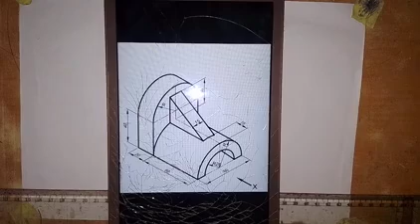Here we are going to be working on this problem. We are going to produce the orthographic views of this object, and the direction of view for the front elevation is the direction of this arrow X.

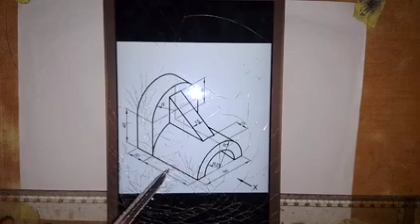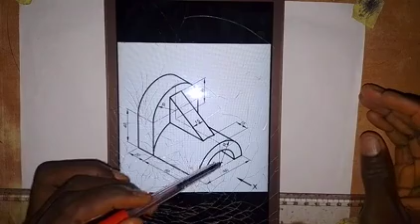So with what we have here, let's talk about the dimensions. We have that from here to here is 80 millimeters, and the radius of this semicircle here is 20, while that of this particular one, I can't see what it is. It is not dimensioned, but I'm going to take the thickness as 10, and then I'll take it as 30 millimeters. So that's what I will take as the radius of this arc here, or the semicircle.

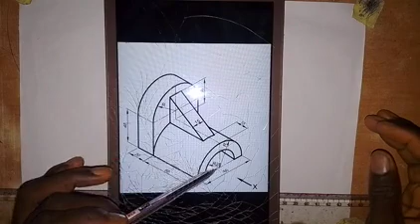And then the distance from here to here is 15 millimeters. The thickness of this is 15 millimeters, and the distance from this point on this surface to this point is 30 millimeters, and also we have the radius here to be 30. The radius of this is known because this is the midpoint, and from here to here is 60. So from this point to this point is 30. So we also have this to be 30.

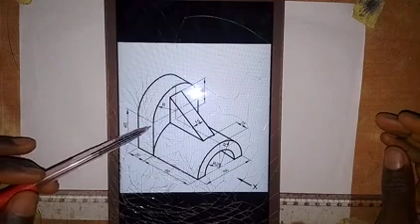So that's the radius of this arc or semicircle, and the distance from this point to the center of this semicircle is 40 millimeters, and the distance from here to here is 60, and from here to this end, the thickness, is 20 millimeters. So we are going to be making use of these dimensions to produce the orthographic views of this object.

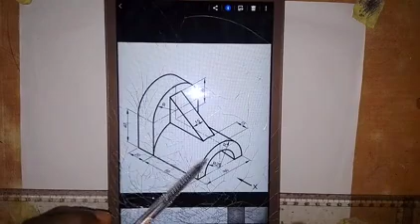But before I go on drawing, in the front elevation we are going to have these two semicircles, then we are going to see this rectangle, and then this part that we see here. So those are things that we are going to put together to get the orthographic views of this object. So let's start with the front elevation.

So the first thing I'm going to do is draw a horizontal line from this end to this end here. Then I'm going to draw a center line to produce the semicircle. So I will draw a vertical center line here in the middle, like this. Okay, so we have this center line.

The next thing I'm going to do is take a radius of 20 millimeters, from here to here. So this is 20 millimeters. I'll put it at this point, then I will draw a semicircle. So it goes like this. So this is the first semicircle that we have down there.

And then the next one, I will take a measurement of 30 millimeters and put it at this point here. And then I will draw the second semicircle that we see in the front elevation. So we have this now.

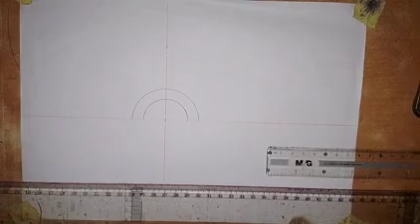Then the next thing I'm going to do is make these lines thick lines. So make this line a thick line from here to this end, as we see it in the front of the object. Then I'm going to take a measurement of 40 millimeters from here to locate the center of the other semicircle that we see there.

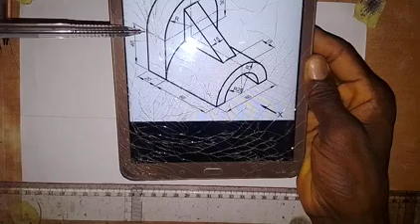So let me bring the diagram as we have it. Okay, so this is the diagram. From this base here up to the center, we have 40 millimeters. So I'm going to take that measurement of 40 millimeters up. So this is 40 millimeters here.

Then with this now, I'm going to draw a horizontal center line, like this. Then I will now take that 30 millimeters again, put it at this point here, then I will draw a semicircle. So it goes like this.

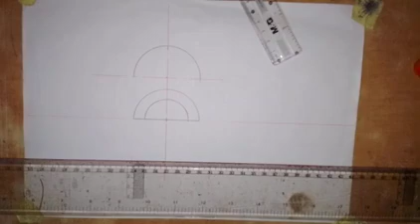Okay, so I want it to be more visible. So we have the semicircle here now. So the next thing that we are going to do here is that I'm going to complete this as a vertical line. So we join it together with this, and then this also, we are going to join it together with this. Okay, so we have it like this.

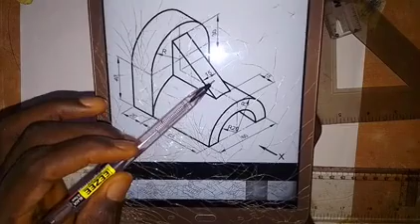So then the next thing that I'm going to put here as part of the front elevation is this rectangle. So let me show you. This rectangle that we have here is going to give us a rectangle. So just after the part for the front elevation, we have this part, and then we have this part, and then we have this part for the front elevation. So as we have that, the thickness of the rectangle is 15 millimeters.

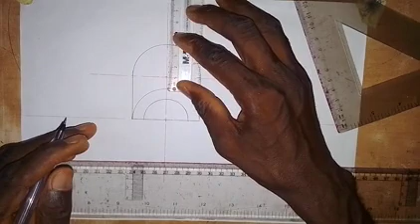So I'm going to take a measurement of 7.5 to the right and 7.5 to the left side. So this is how we have it. So 7.5 to the left side. This is 7.5 here, and then from here again 7.5. So we have it here. So that's 7.5, and the height of that is 30 millimeters. So right from this point, we take 30 millimeters off. This is 30 millimeters. Okay, so I'm going to draw at this point here.

So I will draw a vertical line. So at this point, I'm going to draw a vertical line. So we draw a vertical line here. Okay, and also at this point I will draw a vertical line. So then at this point I'm going to draw a horizontal line, and that horizontal line, I'm going to take it across to both sides like this, because of the end elevation.

So then we are going to thicken this line. So we make it a thick line from here down to this point, and then we also make this line a thick line from here down to this point, and then we also make this line a thick line from here to here like this. So here we have the front elevation. So that is it. So now let's go for the top view.

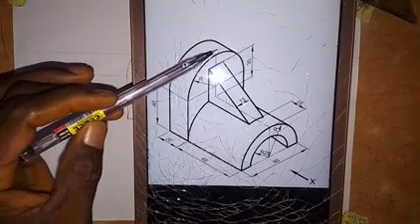So let's see the part that will give us the top view or the plan. So first of all, we have this rectangle. This is going to form a rectangle, and then we are going to have this as a rectangle. Then this part also forms a rectangle. So those are the parts that we are going to have. Then I'm looking at this point. This particular point is going to be hidden in the top view. So we have to take that into consideration.

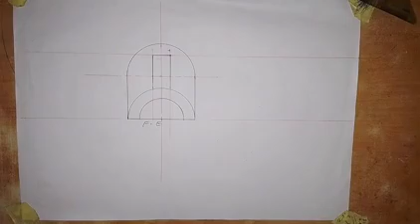So let's look at how we can produce the top view or the plan of this object. So what we have to do first is that we need to draw a vertical line down from this point. So we draw a vertical line down here. Okay, and then we are also going to extend this line as a vertical line down. And then we also extend this line as a vertical line.

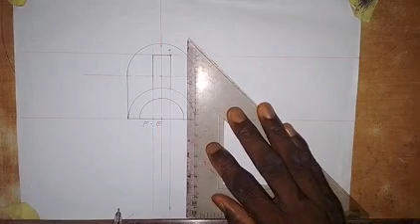Okay, so I need to come here. I also need to draw this as a vertical line down. As I said, that part is going to be hidden from us in the top view. So we also draw this line as a vertical line, and then we come here, we draw this line as a vertical line. So those are the lines that we need to produce. And then we need to separate the front elevation from the plan. So we come down here a little bit, and then you draw this horizontal line to this side.

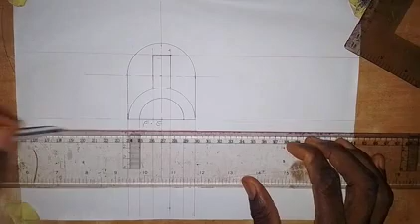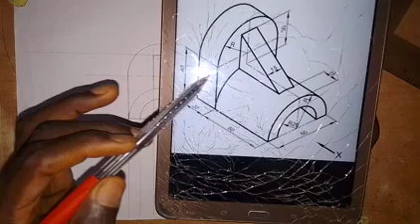Now let's look at the dimensions that we are going to take. So for the top view, looking at this, we have that for this part, the thickness from here to here is 20, and then from here to here is 60, so making 80 millimeters. And then from here to here is 15 millimeters. So let's look at how that can be done.

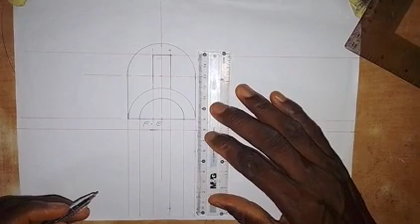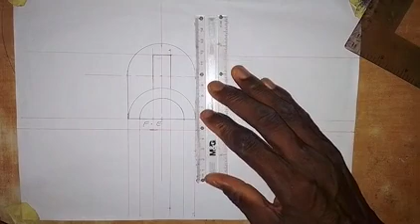So first of all, we take that 20 millimeters, which is for the rectangle part. So we have this, and then we now take 60 millimeters down for the other part. So this is 60 millimeters here, and then I'm also going to take a measurement of this 15 that we have here. We are going to subtract it from 60, and that will be 45. So I will be taking that 45 right from this point here, and we have it here like this.

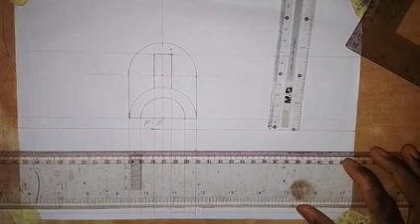Okay, so from all these we are going to draw horizontal lines. So we draw a horizontal line to this side and also to this side, and then we also draw a horizontal line here like this. Then at this point we draw a horizontal line from this point to both sides. So we have this and then we draw this.

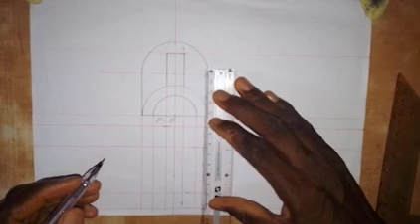So looking at what we have here, the top view is already there, so I just want to extend this line a bit. Okay, so the top view is already there, so all we have to do is to bring out the thickness of the top view. So this line, we are going to make it a thick line from here to here.

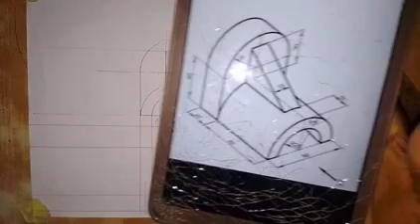And also for this line, I don't actually know if it goes to the other side, but let's assume that this semicircular hole that we have here goes to the other end. Let's just assume that, which means that from this point here, we have to draw this line as a short dashes line. That is the line that we use for the hidden details of an object. So we need to draw it to this point here.

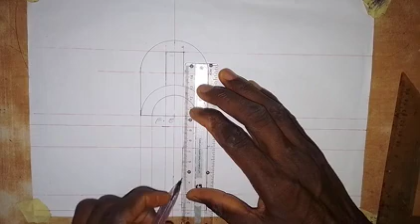Okay, and then for this part, we have a rectangle from here to here. That is the web. So we call that part a web; that is the web that is placed on the object. So that has to be a rectangle, and then we also have this to be hidden. So as we did for the other one, we also draw a short dashes line at this point here. Okay, so we have this.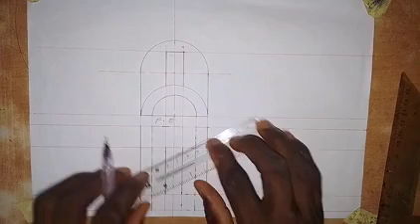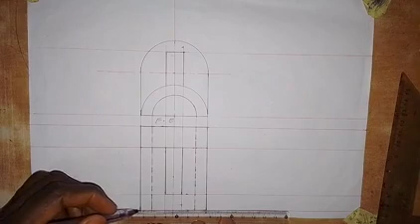So this line, we also need to make it a thick line from here down here, like this. Then this line will be a thick line. And then this line is also a thick line to this end, and this line here, we just make it a thick line from here to here. And for this one, we have a thick line all through, from here to here. Alright, so we have the top view in place.

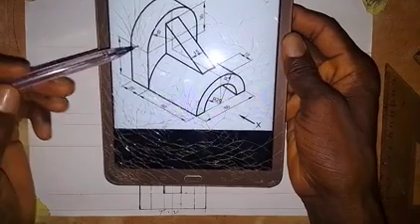Alright, so here now we have the top view, as we already have the front view, or the front elevation. So let's go and work on the left end elevation. For the left end elevation, the object is being viewed in this direction. We are going to see this part as a rectangle, then we are going to see this as a right angle triangle, and this part here will also be a rectangle. So that's what we are going to get.

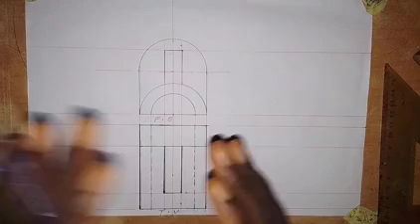Okay, so I will only draw the left end elevation; I will not draw the right end elevation. For the left end elevation, it will be here on the right side of the front elevation. We are drawing first angle projection. In first angle projection, we always have the front elevation above the plan or the top view.

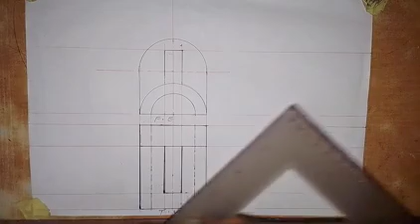Okay, so now to draw the left end elevation, as I said, we are placing it here. So we have to draw a line at an angle of 45 degrees to this line here. So we are placing the set square at this point on the front elevation.

So we just set it like this, as you see it here, and then we draw this line to be at an angle of 45 degrees to the horizontal. So this is the set square that you have to use, the 45 degree set square.

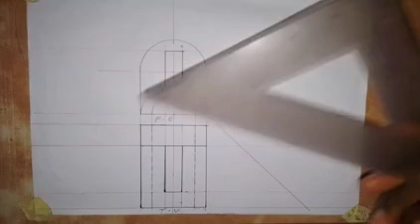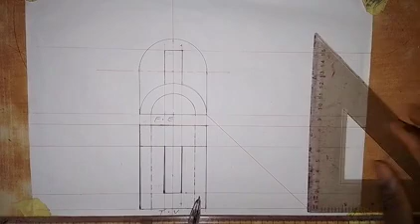So the next thing that we are going to do is draw a vertical line from each line that comes out of the top view, where they intersect. So this line intersects all the horizontal lines that come out of the top view, or the plan, at this point. So at this point here, we have to draw a vertical line.

So you take a vertical line, going up like this. Okay, so then we come to this point, we also draw a vertical line here. And then coming to this point here, we draw a vertical line like this, and at this point here we draw a vertical line like this.

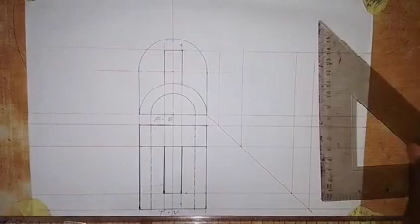Alright, so there are some lines that I still need to draw out of the front elevation as horizontal lines. So coming to this point on this small semicircle here, I need to draw a horizontal line to this side, and then I will also come to this point here and draw a horizontal line to this point.

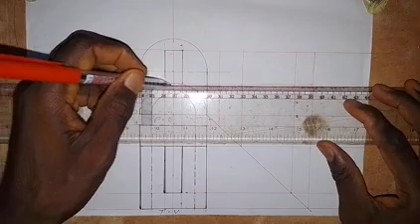And then for this part that we have here, it goes a little bit lower than the semicircle, so I will draw a horizontal line like this. Coming to this point here, I've already drawn a horizontal line, but at the top of this semicircle I will draw a horizontal line. So we have all this.

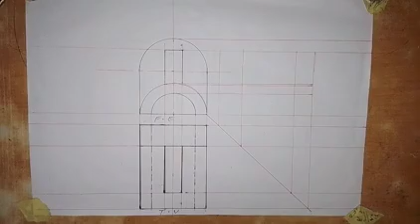So all that we need is already here. The other thing that I need to do is to bring out the left end elevation. So first of all, let's do it together. With the ruler, as I said, I need to extend this line, but I'll just draw it directly.

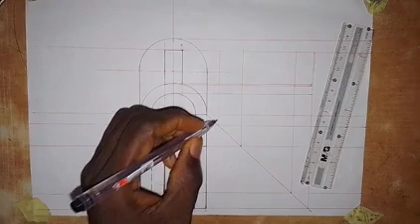Let me bring the object. So the rectangle that this one is going to show us, it is from here to here. And then if you follow this line, it starts from here, okay? And then you follow this one, it ends here and it goes up, up to this point on this line.

So I'll just draw from here. I will draw a vertical line from here down to this point. And then this line also, I will draw it as a vertical line. So we have this down. Alright.

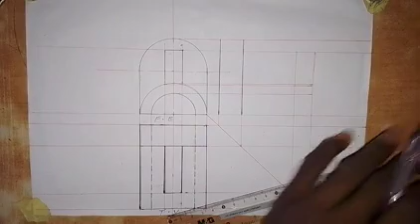So coming to this part here, it goes like this, okay? To this point here, and then we are to join it with this point, the point where this line goes. So we join this together, like this.

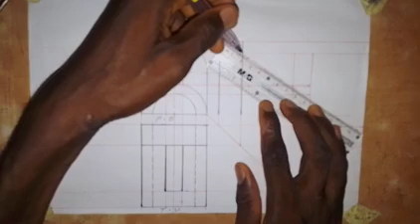So this is a non-isometric line, so you use a ruler to draw it, and then this line will be made thick as the base of that right angle triangle that we have there. So this line also, we need to make it a thick line, okay?

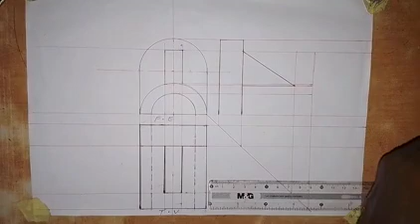Alright, so this other part that we have here is going to form a straight line, and this is where we have it. So we have it like this, from here to here. And then for this line, we are going to have it as a thick line, from here to here, okay.

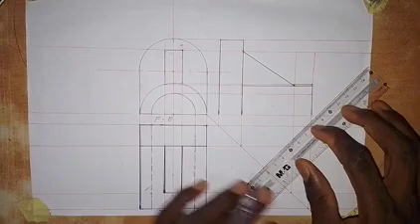Alright, so we have this line, and the whole of this line will be made a thick line, from here to this end. Alright, so this gives us the end elevation. So here we have the end elevation, and this is actually the left end elevation.

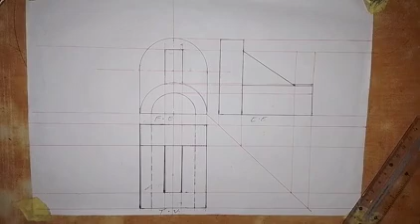So we have solved the problem, as we have produced the front elevation, the plan, and also the end elevation. So thank you, keep on practicing, and God bless you.